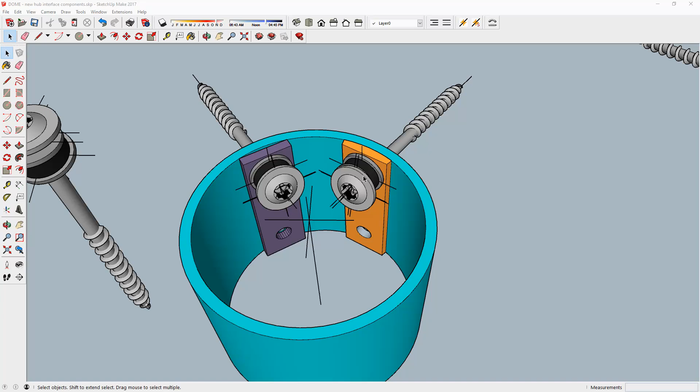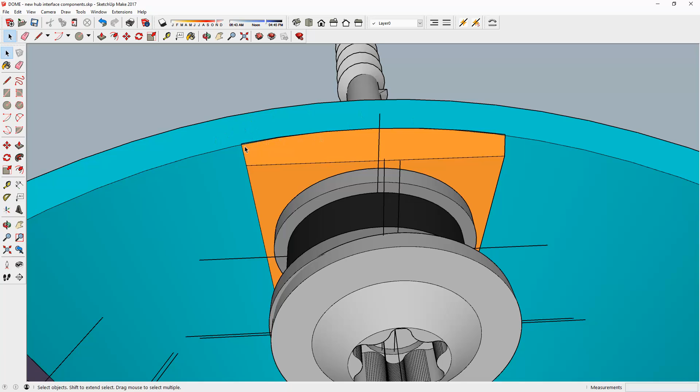I was making a comment once that played in the back of my mind, regarding how this curved piece of tube from the hub can be inserted on the inside as our interface plate, because it's already sort of pre-curved to the inside shape of the hub itself. But, of course, it having a slightly different diameter or radius or curvature means there's a little bit of interference on the edge points.

I then said, but that's not necessarily a bad thing. What I was meaning there was that as the strip here moves back ever so slightly, maybe 0.2 of a mil, I've just typed it in, it'll touch on those 2 points and sort of self-align.

Yes, it would be better, more elegant, to have it touching completely along that inner surface, and to be fair, a little touch of the belt sander on the edges would pretty much make it flat and bed into that inner surface. But in the back of my mind was, it's not necessarily a bad thing having a plate touching on those 2 edges.

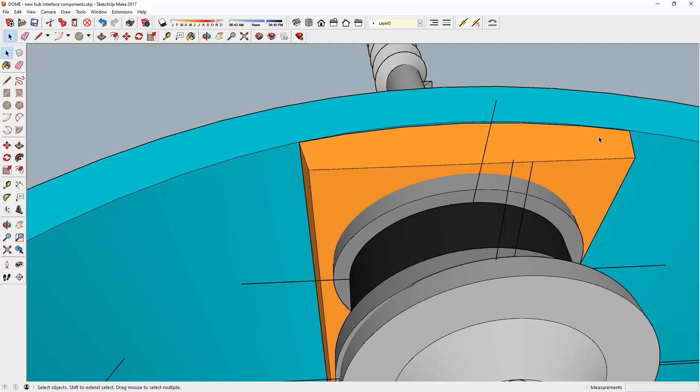Then I made the comment that this isn't a high demand area, and the load put upon it, or any part of it, probably is not going to be that great.

What if I don't even make, and you can see it, I've given away the punchline already. What happened if I don't even go to the extent of cutting strips out of the tube, but just use a 25 or 30 millimeter wide flat bar of X millimeter thickness, in this case 5 millimeters.

After all, isn't there a washer, or actually several washers, that will apply pressure in a slightly dispersed manner, because it's not very thick, only 2 millimeters thick, but the pressure would be exerted largely against the very edges of the flat bar, and something would have to deform before it becomes a problem, which it probably wouldn't be even if it did deform.

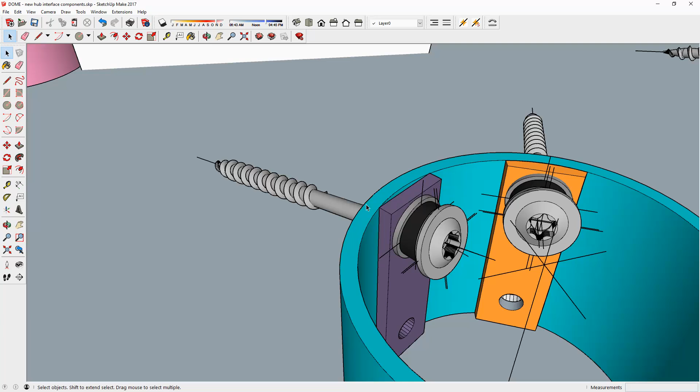For this to bend, there has to be a lot of pressure put on this area. Now let's assume, as I said, that that's not going to be the case. Wouldn't this be easier to make? Well, yes, it gets rid of a whole process.

You just go and buy the stock bar, you can get it. In fact, wait there, I'll bring up my chart and see what thickness we can get. Yep, here we are, and we can have 25 by 3, 5, 6, 8, so we can beef up very easily the thickness of the flat bar.

6mm, 8mm, that is really heavy, and there's no chance of it bending, not under these circumstances. We could go 30 by 5. Again, I'd rather go a little bit narrower and thicker, just to make things easier on me.

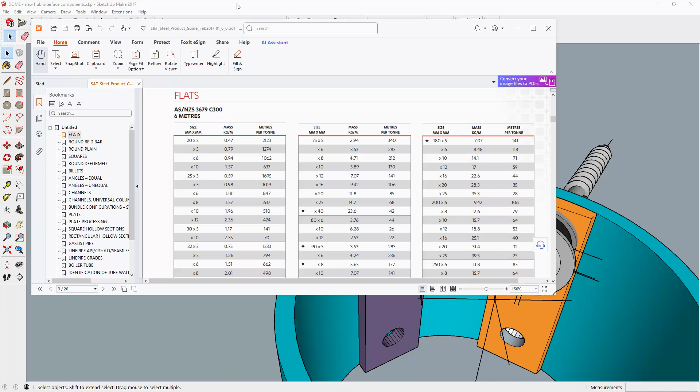I'm going to have to give that some consideration. In fact, we know that the maximum thickness of this is 5mm, hence that's why I made this one 5, and we just flat off the edges, so that's 5mm, that's 5mm.

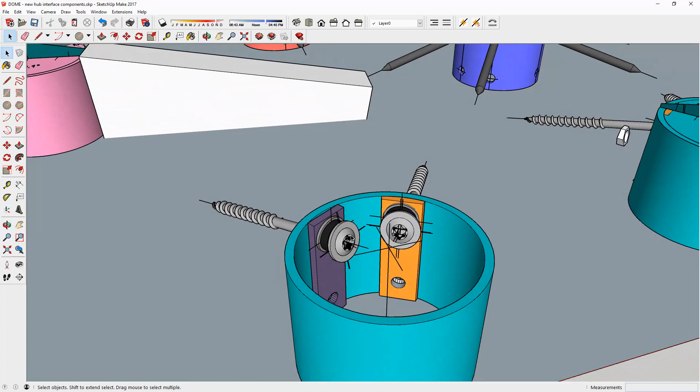Very simple. The other thing was, I was a little bit underwhelmed by the sloppy fit of the plastic tube on the assembly. It looks all nice and neat here, doesn't it? And that's the way I'd like to see it act in real life. But what tends to happen is, because this has got a larger diameter, it tends to drop down so that the inner surface rests on the shaft of the screw, and therefore it's not a balanced assembly.

So it would be better if the plastic were solid and a hole drilled in it. So now it requires me to go to a plastic supplier and see whether you can get this sort of plastic. It's a polyethylene, in a solid rod.

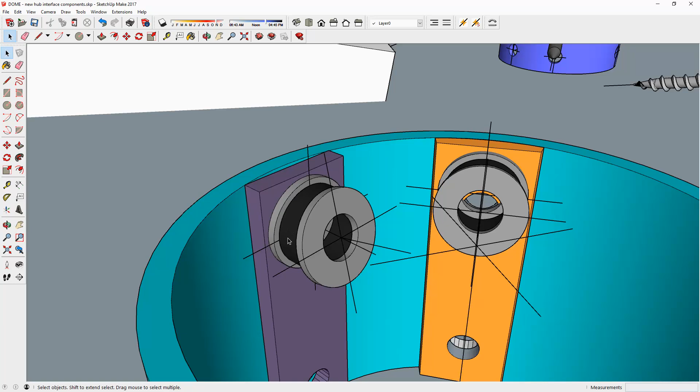My initial investigation, and if I'm correct, this was a medium density polyethylene. You can't get that in a rod. You can get the high density, but not the medium density. So it'll be a case of ask and find out.

But still very happy with using that. It doesn't have to be that particular plastic, it's any plastic that can be obtained in a 25mm rod, thereabouts, and easily machined like this is. It planes well, which I've done in the past, and it cuts well.

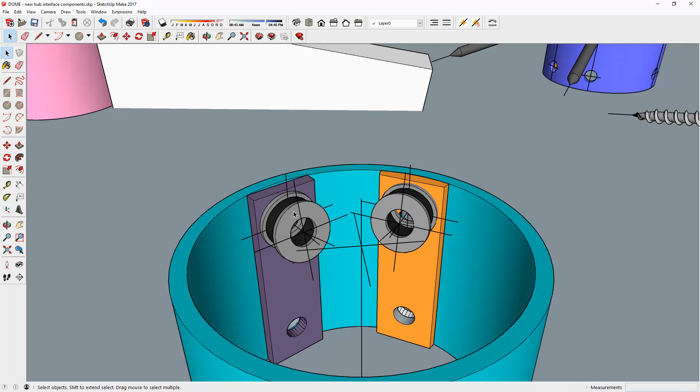So therefore, I would like to chase it down. Plastic suppliers could offer up an alternative, of course, and that's the beauty of asking people that know more than I in their respective fields. So, yes, interesting.

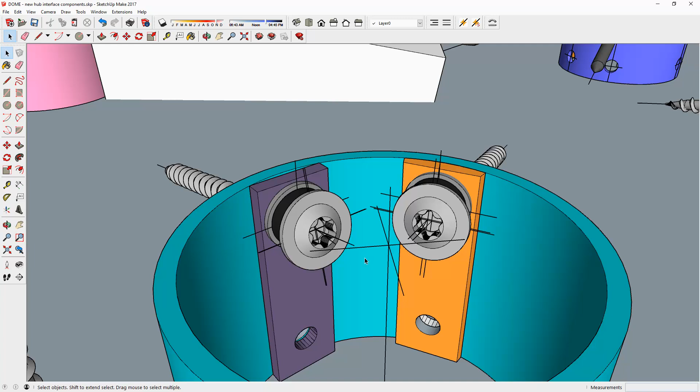I think I'd go down this route rather than this, simply because of its simplicity, and it may well be that... no, I'll stop there. More simple, able to be... it's not going to cause any dramas, I don't believe. Okay, as I said, I'll stop there.

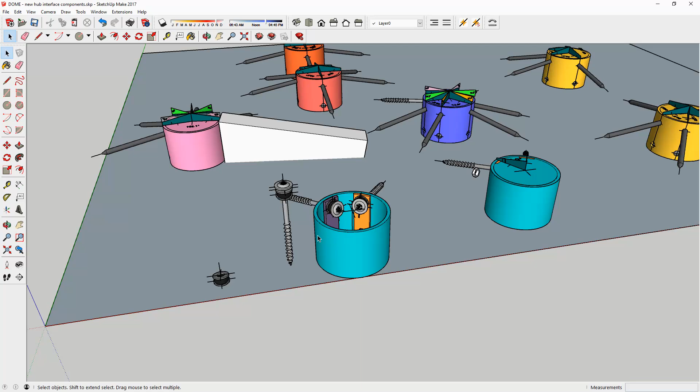The next stage is to figure out the demands of the lower leg and how to tie it to the ground, because this type of assembly, which is the very bottom hub assembly, has got no facility to hold down to the ground. Now, I had thought about having a plate welded onto this, but again, that goes against the design philosophy of what can we do with our simple tools that won't bite us.

Now, welding - I've got a welder, an arc welder and a MIG welder, but in our jurisdiction, if we were to use this at home, just do it, but if it required a permit, it would have to be welded by a certified welder, which would be wise when you consider the quality of my welds anyway.

But if we can eliminate the demands in that area, probably not a bad idea. But if this were to be a permitted job, then I probably would have had to have engaged the services of an engineer to get their tick of approval or their suggestions.